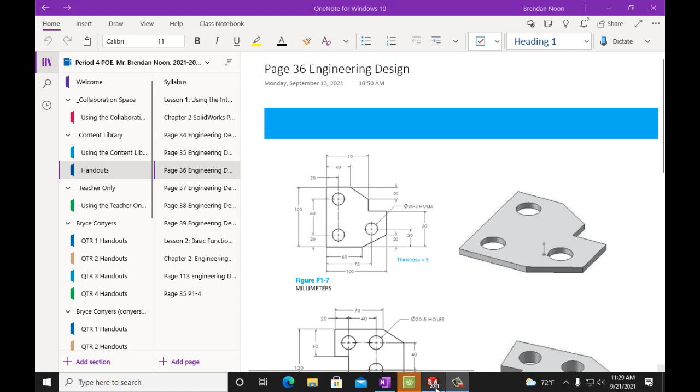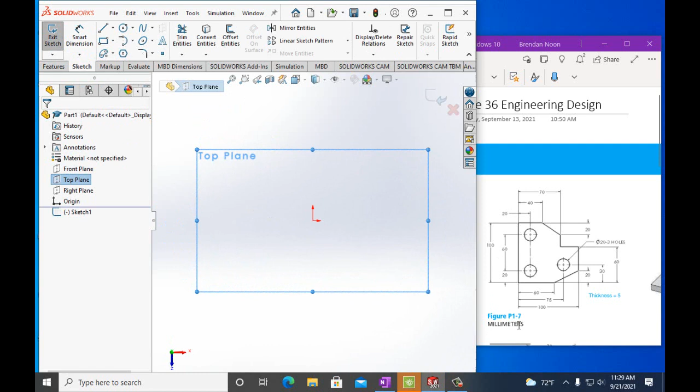All right, so we'll open SolidWorks. First I'm going to make this... that's good right there. Open SolidWorks. So we're going to start with the top plane, and we're going to do a sketch. What I'm going to do is go off of this edge 60 millimeters. This is in millimeters, and then up 100.

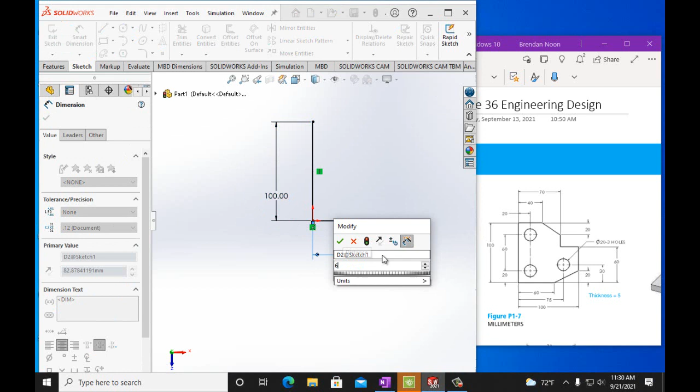So I'm going to start here. I'm going to go over this way, and then I'm going to go up this way. I'm going to smart dimension this to be, this is millimeters already, 100 millimeters, and this one to be 60 millimeters. So this is our start. I'm going to scroll the mouse over here so it gives me more area to do this.

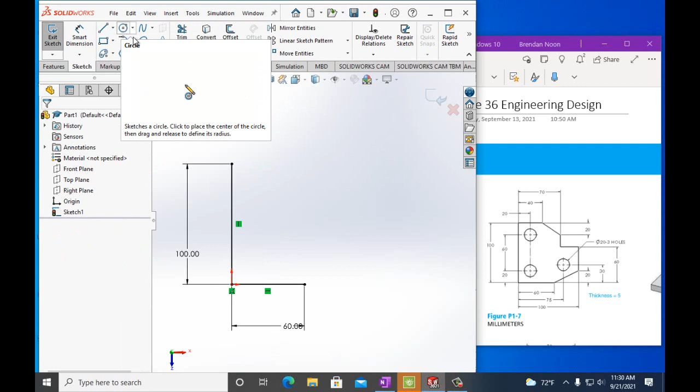All right, so let's see what we got here. I'm going to do a line across this way. It's about 40. And then, I think I double clicked. Nope. All right. So I'm going to come across 40, and then I'm going to do an angle. I'm going to go down over this way and then an angle that way. So let's do this one first. This one's going to be about 40.

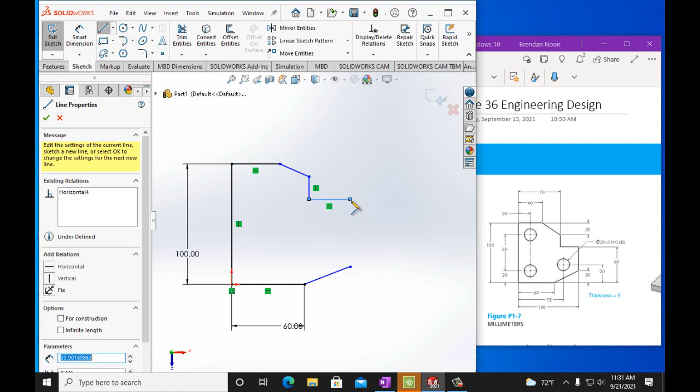So somewhere around there. And then I'm going to have a line that goes something like that. Then we're going to go down, and I'm going to go over, and then I'm going to go down. All right, so we connected that, and I think we have these shapes. So this across, we get smart dimension. This should be 40 millimeters.

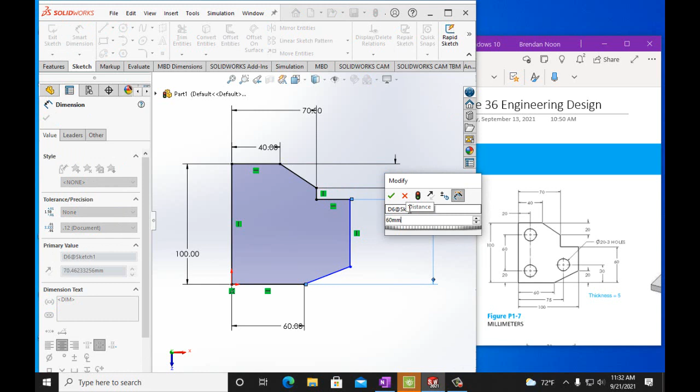Let's do this point. So we have from this point to that point is 70, and then from top to bottom is 20. So we're going to go from this point to this point, make that 70 millimeters. And then from this point to that point, we're going to make that 20 millimeters. And from this point to this point, we're going to make that 60 millimeters. All right, this is 60.

And then we're going to have from this point to this point's 100, and from this point to this point's 20. So we'll go from this point to this point is 100 millimeters, and from this point to this point is 20 millimeters. Oops. And we have from here to here is 60. We already have that in there. So I believe we have this shape completed correctly.

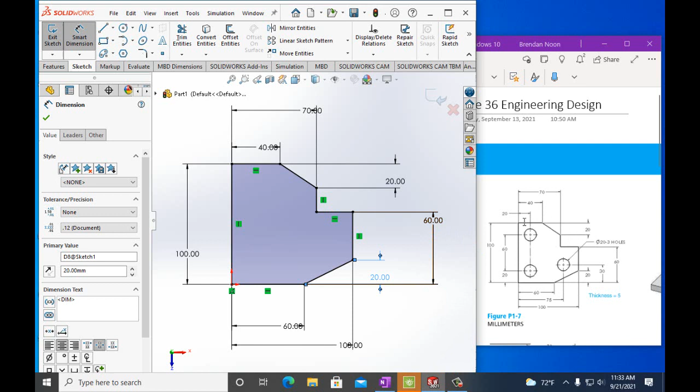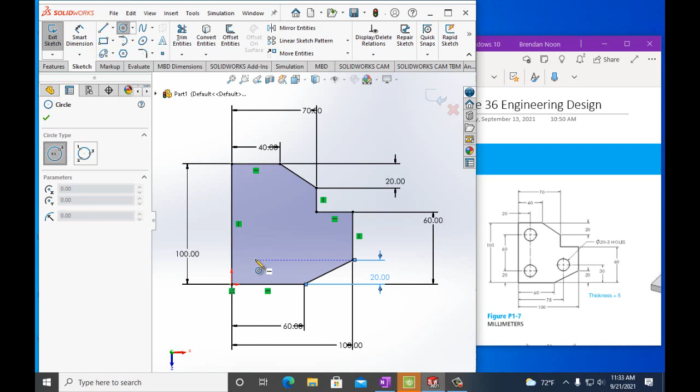We just have to put in our circles now. All right, so we'll do our circle tool, and we're going to put this here, right? Because this is at 20. That's at 20. This is at 20. So these are the same height. So we can put this in here and draw a circle. And we want to smart dimension that. We want our circles to be 20 millimeter diameter. So we go 20 millimeters.

And we want it to be over 20 from the side. So we go like this, and we want to make sure that's 20 millimeters. Okay, so this circle's in the correct spot. So we're going to put a circle that's just above this, 20 millimeters over, and then it's going to be 60 millimeters across. We're just going to draw a circle like that, and we're going to smart dimension this. We want this circle to also be 20 millimeters.

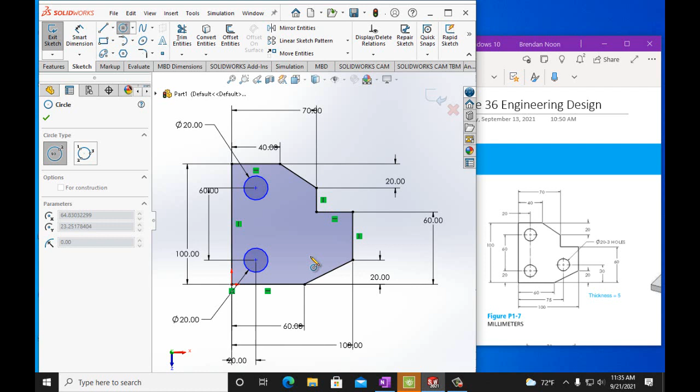And we want it to be from center point to center point 60. So we go here, go there. We make that 60 millimeters. Right, so that circle is in the correct area. And now this one is going to be over 75 and up 30 from the base. So we're going to make a circle, and we'll draw it right there like that. We're going to smart dimension this. First we want this to be 20 millimeters. And we want it to be from this line to this line 30 millimeters.

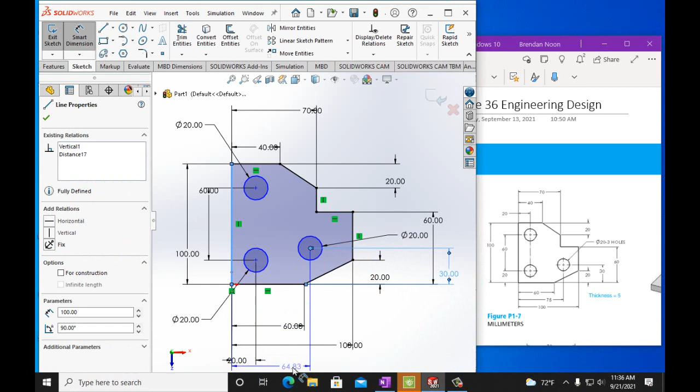And then we're going to want this to be from this point to here 70 mm. All right, so 70 mm for that one right there. Oh wait, no, 75, sorry. 75. So I just double click on that number, 75 mm. And there, this is 75. So this is 75 and that's 30.

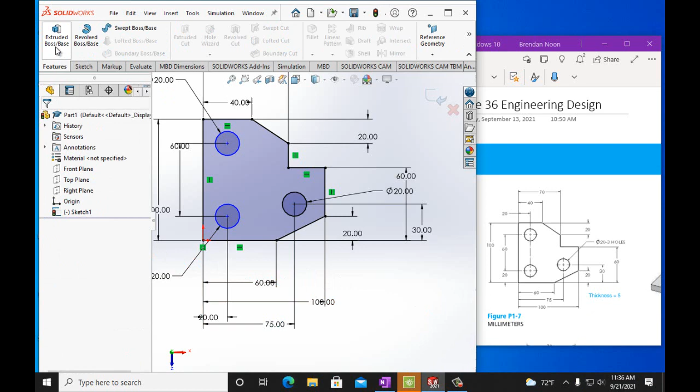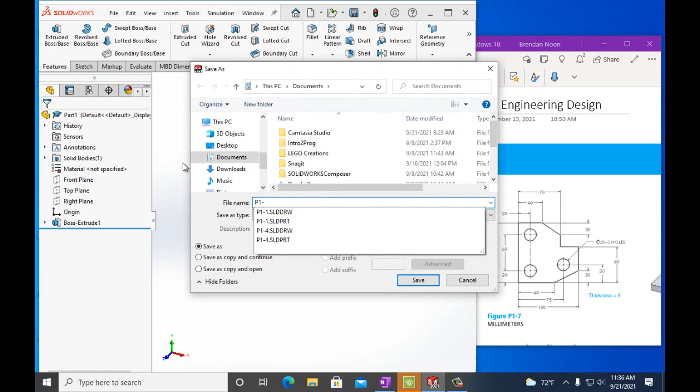And our thickness is 5 millimeters. So go ahead, check mark there. Extrude boss base. We have it at 10 millimeters. We're going to want it to be 5 millimeters. Hit OK. And there we go. So we're going to file, save as, P1-7, save. Then we're going to create our drawing, make drawing from part. Make sure we have ANSI landscape, hit OK.

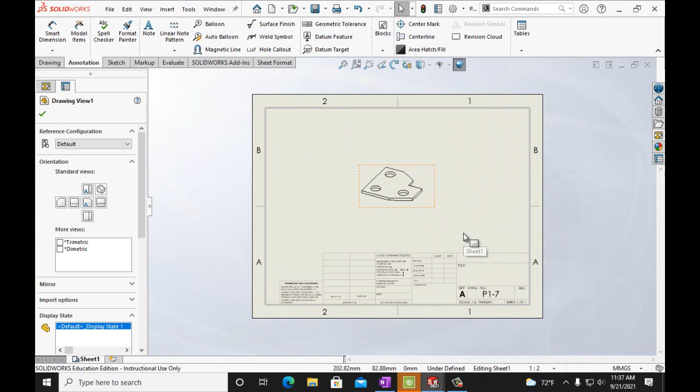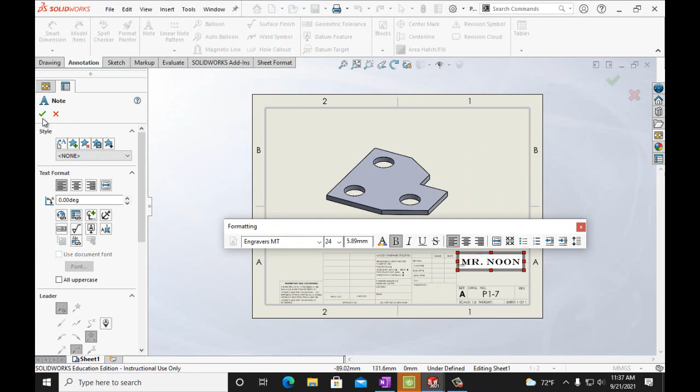Let's make this full size. We can pick any of these, but this one's nice. You don't have to do this, but I like to have a nice solid, and I like to find a scale that's a little bit larger than what I'm seeing here. That looks good. And then I go OK, and then under annotation, a note. Click that there. Pick a good size, any font I want, make it bold, and type in my name. Hit the green check mark. File, save. Okay, that's good.

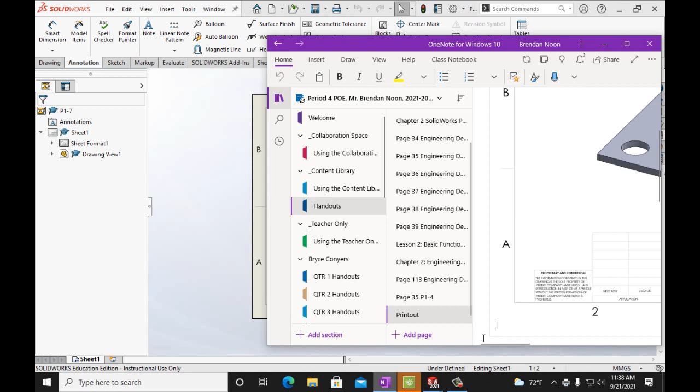And then we're going to file, print. We're going to print it to OneNote for Windows 10. Hit OK. We hit handouts. We hit OK. And there it is. All right. There you go. And this is part P1-7. So we're going to write down page 36, P1-7. And that appears right there.

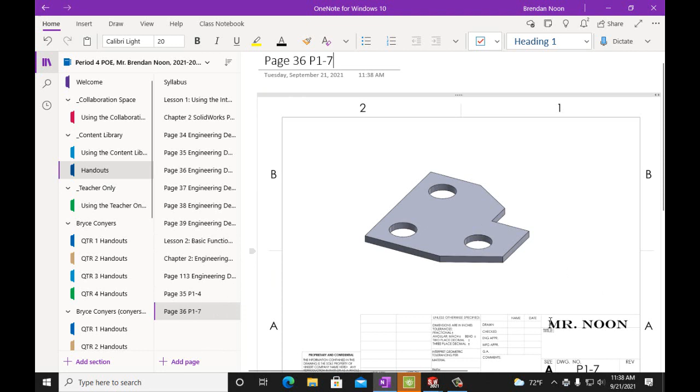And you can go ahead and do the other two, page 36. So now go ahead and do this one and this one, and then submit your work into your notebook, and then you'll have completed this assignment. So good luck.